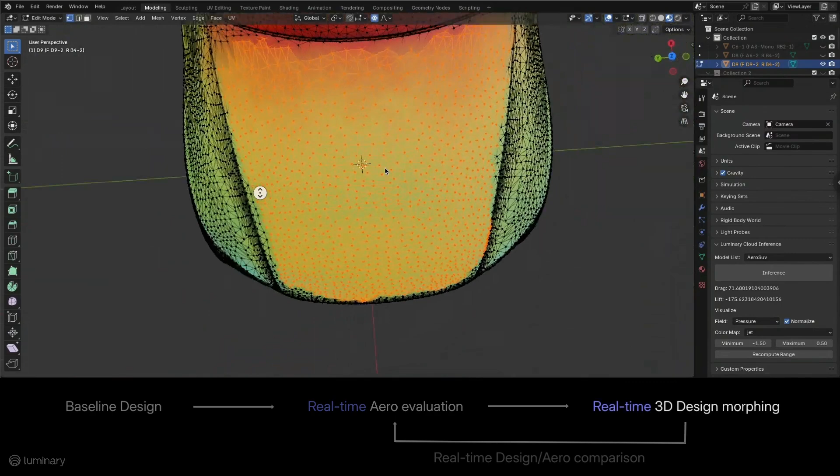I came across Luminary Cloud, a startup in the San Francisco Bay Area, during the NVIDIA GTC news coverage because they were one of the early adopters of NVIDIA Omniverse Blueprint for real-time digital twin visualization. This month, the company is releasing an open-source SUV simulation model. You can think of it as a template for simulating the aerodynamics of standard SUVs, which you can take and then customize for further use. This is just the first in a series of models the company plans to release.

Here's more on the company, its vision, and the product from Juan Alonso, CTO and founder of Luminary Cloud.

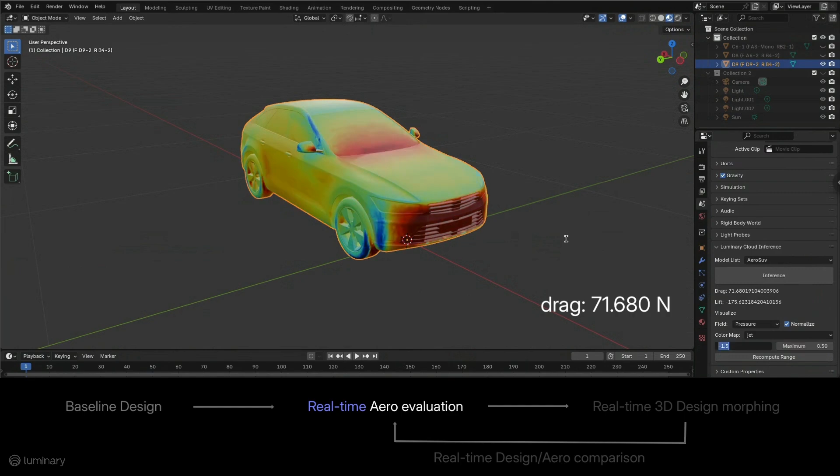We're extremely excited about this because on Tuesday we're going to announce the first of a number of what we're going to call shift foundational models, which are large data sets of very high fidelity simulations and a physics-based AI/ML model that's trained based on that simulation to be able to do inference about new shapes of SUV vehicles faster and more accurately than ever before.

Luminary Cloud was founded about 5 years ago, but for the first 4 years of the company we were in stealth mode, developing capabilities to change the way we do computer-aided engineering and analysis.

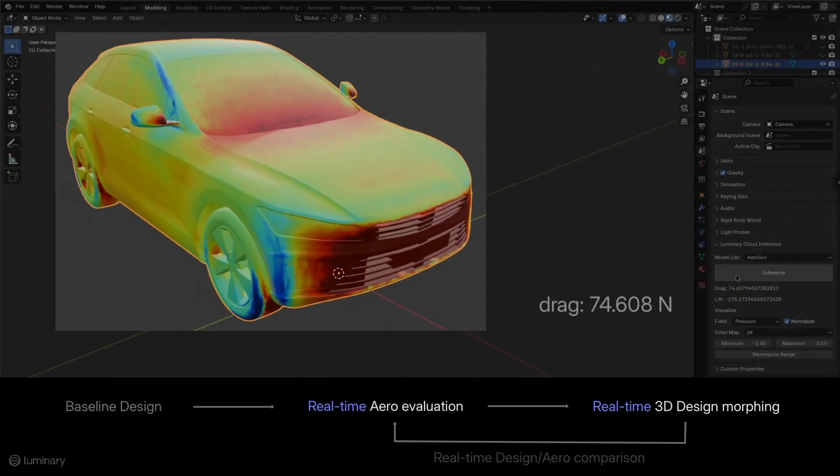Luminary Cloud has developed a fluid thermal solution that includes CFD, heat transfer, and the combinations of those two, in order to do analysis of external, internal aerodynamics, heat transfer problems in a cloud-native and GPU-native way that enables us to do simulations about 100 times faster than equivalent CPU-based solver technology. And it allows us to do it in a manner that is much more automated end-to-end.

Because of our capabilities in GPU solvers and because of our cloud-native footprint, we are also able to marshal amazing amounts of resources in order to not just run one calculation quickly, but hundreds of simulations simultaneously, and therefore be able to create massively scalable simulation databases that can be fed as the input data to train models that then can be embedded into any engineering workflow.

The physical solutions that we have right now compete directly with many of these CFD vendors, and our plan over time is to continue to increase our physics capabilities and the combinations between the physics in order to have multi-physics simulations. We're not there yet, but for the fluid thermal physics that we have, we think that we can do what some of these larger companies that have been around for very long much better, much faster, more accurately, and without having engineers deal with all kinds of IT format conversions, etc. So in a truly end-to-end integrated fashion.

We have in the product today an AI assistant that effectively any user can type in a ChatGPT or LLM type of environment, anything regarding what we want to do as a user in the product. So set up a simulation with a far field at this distance, set the far field boundary conditions at these sort of values, speed, temperature, so on and so forth, and perhaps even say something about the level of resolution or the level of accuracy that you want. The LLM in the product today can take all of that and actually, through calling all our internal APIs, set up the simulation automatically for the user. That's one example of what we can do.

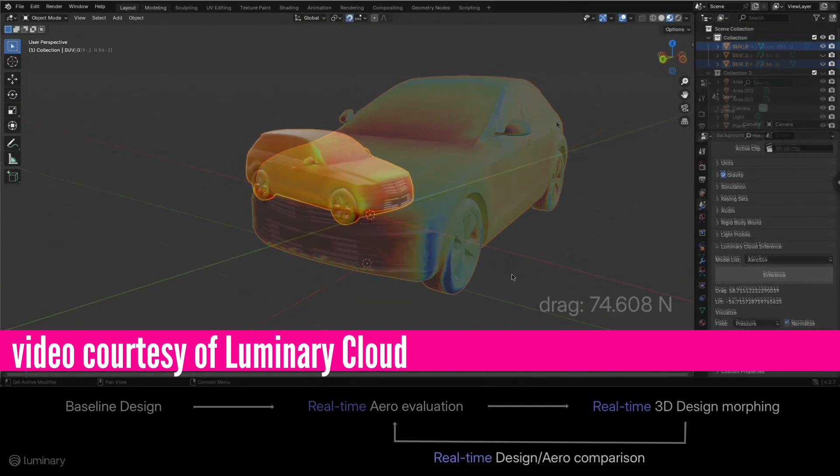A natural language processing extension, so you can speak to the product rather than type, is a very logical extension that a customer I visited yesterday was actually asking us about. We are not pursuing AI for the sake of pursuing AI and just putting a little AI stamp on the Luminary product. We're pursuing AI to make a difference in the engineering workflows for analysis and for design optimization that most engineers want to pursue.

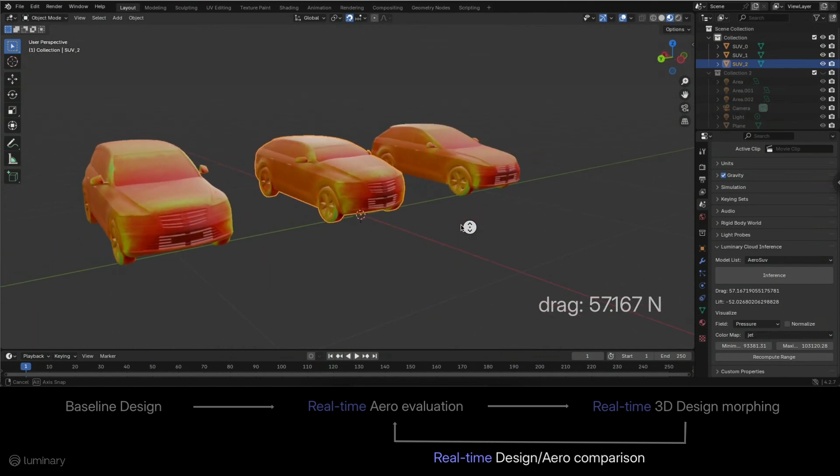So AI is an assistant, and we actually call it the AI assistant. It's making your job as an engineer simpler, faster, more repeatable, more reliable, etc., but it's not really replacing you.

Eventually, when we combine this AI assistant with the shift models that we were talking about, and we have very quick inference, so sub-second inference for any new design, what you'll be seeing is that the AI assistant will also be providing recommendations as to how you might change a design to make it better. But again, every pursuit of AI within Luminary, and as CTO I'm in charge of this, is to make sure that we improve the ability to do engineering analysis and design optimization.

It is exciting to see how quickly the world of physics-based AI and ML is progressing, which is different from the mainstream AI sort of applications, write a paper for me, create an image for me, doctor this video to do something else, but rather that is trying to simulate the physical world in a much quicker and accurate way than we could ever do before. It's incredibly exciting to see how quickly this is evolving.

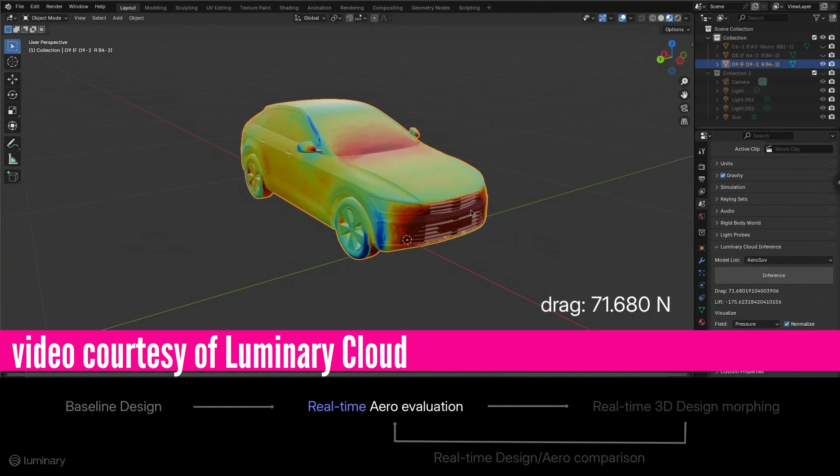The bottleneck is data and data availability. There's not enough data to train these models unless you can produce the data very quickly. So Luminary is building the platform not only to train the models, but also to be able to produce, curate, store, and use the data that's necessary to feed these types of models.

I think the sky is the limit. Things are changing very, very rapidly. Over the course of the next, I would say, 3 to 5 years, engineering design is going to be fundamentally altered from what we have been thinking about as engineering design for the past 30, 40 years.